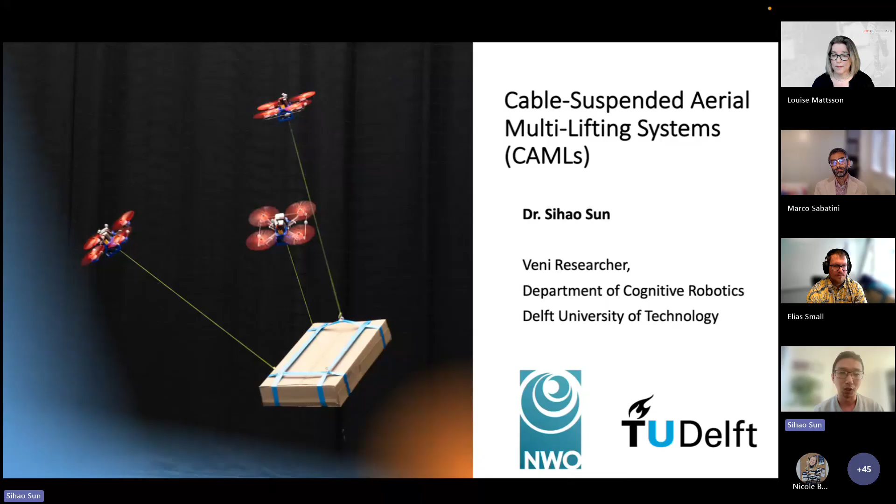Okay, so hello everyone, my name is Sihao, and I'm currently a researcher from TU Delft, embedded in the Department of Cognitive Robotics. The title of my presentation is Cable Suspended Aerial Multi-Lifting System. The name is rather complicated, but from the picture on the left-hand side, you can tell that we want to use multiple drones, quadcopters, to carry and also manipulate the orientation of this cable suspended payload.

So why do we do that? Carrying a cable suspended payload with an aerial platform has been a long-standing approach, and we have seen that in many domains already, in particular using helicopters. For instance, we see helicopters for logging, for transportation of construction materials, and even for some military purposes. But in recent years, we also saw some development of heavy lifting drones, and some deployment of them in offshore transportation scenarios.

In particular, the one on the top right is the heavy lifting drone developed by an Italian company called Flying Basket. Their drone can lift up to 100 kilograms. And now they are collaborating with companies in the North Sea to carry equipment to offshore wind turbines. So actually, there are many applications possible, not only in Europe but also globally.

But if you look at these two types of loading methods in the general landscape of aerial carrying, you can see that there are still big gaps between the current technology and our requirements. On the very left-hand side, that's using a small UAV for carrying the payload. The problem of using a relatively small UAV is that the payload capacity is very limited. For now, the biggest quadcopters or octocopters which can carry payloads are roughly in the range of 200 kilograms of payload capacity.

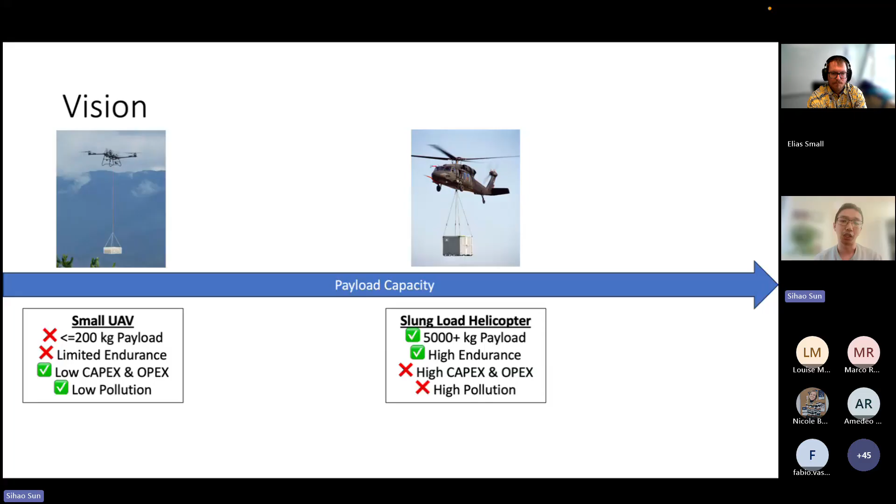And since most of them are battery powered, they also have very limited endurance. If you look at the helicopters, of course they have a much heavier payload capacity, but the problem is that they require very high operation cost and also relatively high pollution. So if we want to fill the gap between these two categories, either we make the helicopter smaller or we enlarge the UAVs, but that won't fundamentally solve the problems of these two categories.

Another solution is what we proposed here, and you may have already seen some recent videos released by DJI two days ago. Basically, we can use a team of UAVs to collaborate and carry the payload, because we can change the size of the UAVs and the number of UAVs included in the team. So the payload capacity can be largely increased without the need to develop very large scale UAVs. This has the advantages of both categories on the left and the right-hand side.

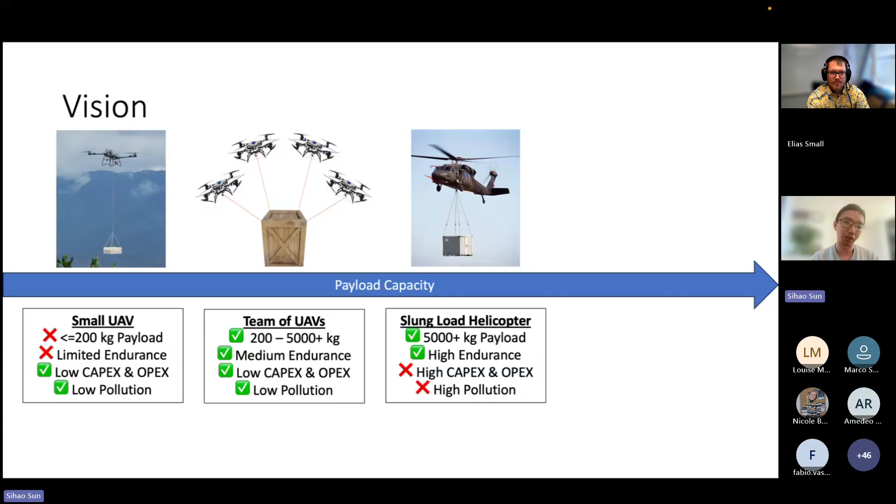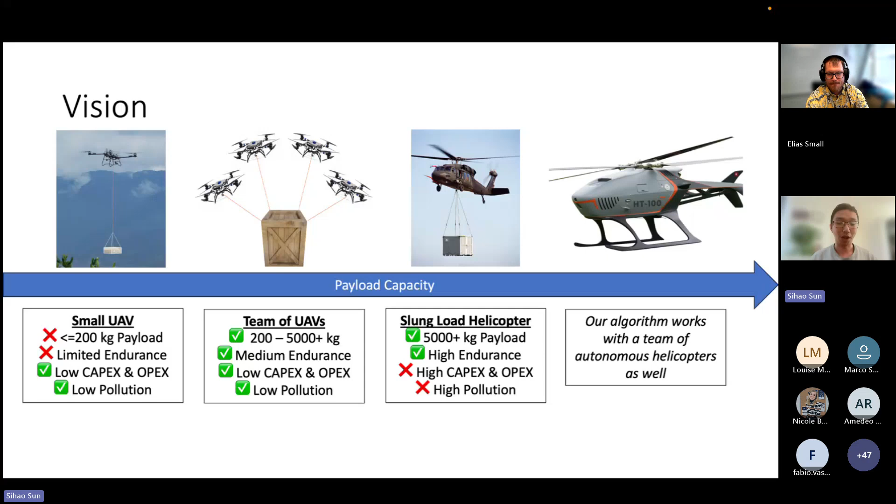And on top of that, if we think about the future, potentially we can also make the helicopters unmanned and fully autonomous. Then we can use our algorithms to team up many heavy lifting helicopters, and lift payloads that are much heavier, even over 100 tons, for instance.

To develop and test these algorithms in our lab, we can't make a very big platform because it's mainly for prototyping. So the platform we're using is actually a very lightweight UAV. Here you can see it's a self-made UAV, and the takeoff weight is only 650 grams. We use a Raspberry Pi 5 as the onboard compute module to run, or partially run, our algorithms.

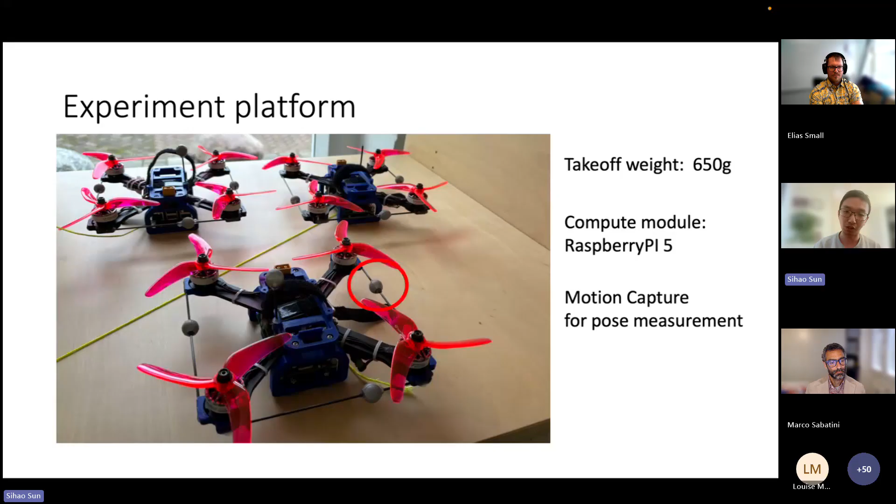Since we do everything in the indoor environment, we also attach the OptiTrack or Vicon markers for the motion capture systems to provide the pose measurements. Of course, if we want to move to outdoor environments, we're going to change this to RTK GPS together with the magnetometer, along with some other sensor fusion algorithms, but those will be future work.

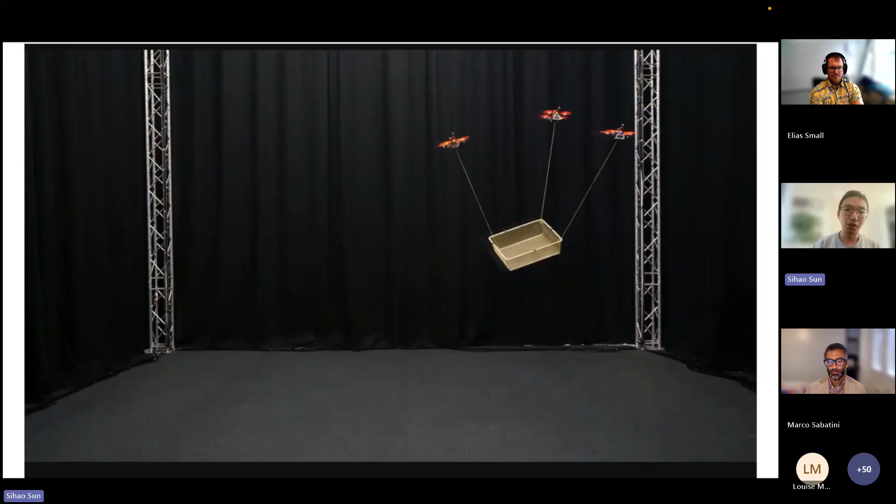So with our platform, what we have achieved, as you can see in this video, is that we can use 3 or 4 UAVs to collaboratively carry payloads. On top of that, we can also change its orientation. And here you see that we can even change the shape or configuration of this team of robots in order to squeeze into this vertically oriented gap, which is even narrower than the width of the entire system.

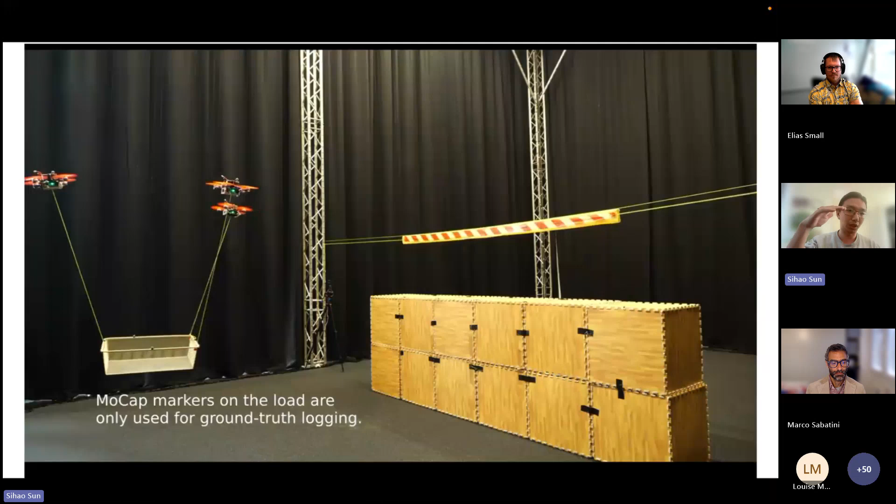This is another example. We put a horizontally oriented gap, which is also narrower than the size of the entire system. You can see that our algorithms generate these receding horizon trajectories and send them to the 3 UAVs included in this task.

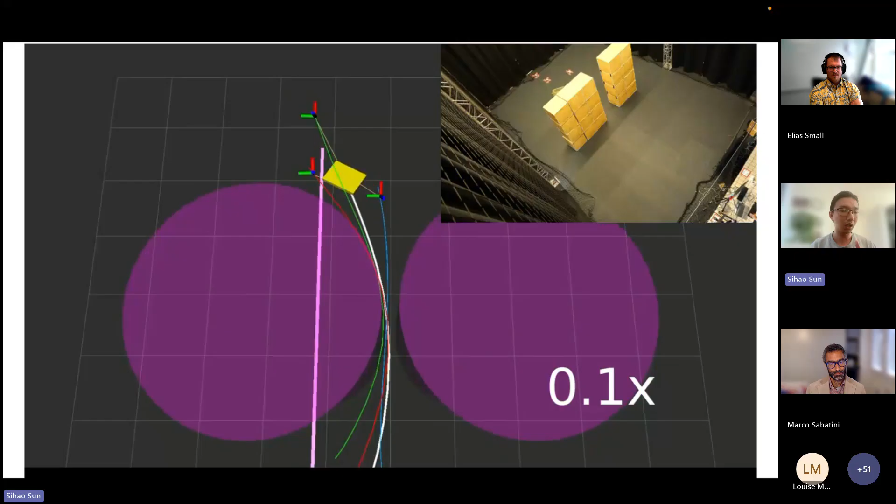When the 3 UAVs are following these trajectories, they can avoid these no-fly zones, and on top of that, they can also control the payload and even change the inclination of the payload in order to squeeze into this narrow gap. So by providing global trajectories, our system can follow them.

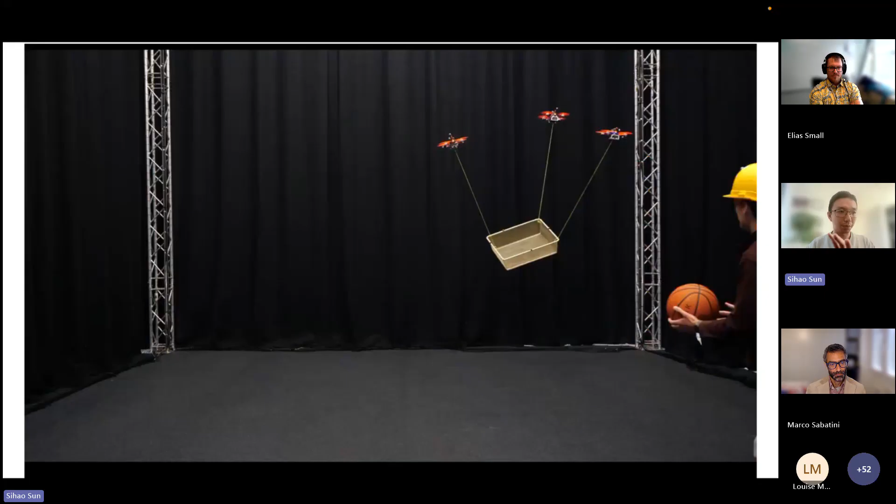And here you see that my colleague throws a basketball into this basket-shaped payload to induce some additional, let's say, sloshing disturbances. These disturbances are not considered by our algorithm beforehand, and our method can react to this sudden change of the payload, showing its robustness.

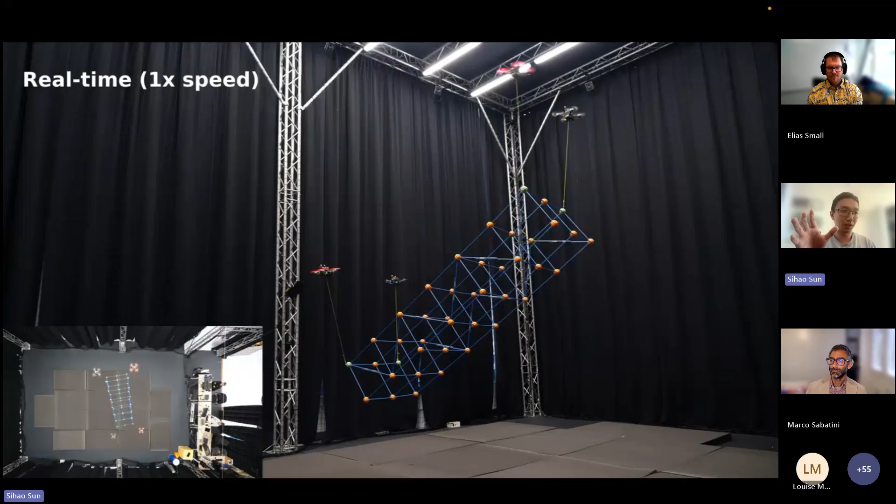This is another example that we explored recently. Here you can see that I use four of those small UAVs to carry a very large-scale space frame. The space frame weighs 3 kilograms. It's still quite lightweight because it's made from the DIY toy of my daughter. And the size is 3 meters, but you can still see that we can already change its orientation at a relatively fast speed, without violating the constraints of the drones.

And this can already imply some potential future applications. For instance, this is one funding that we recently got. It's about how to explore using these solutions for construction. If we can use multiple of these cable-suspended aerial multi-lifting systems, or CAMLs, we can really deliver the prefabricated building components on site and change their orientations to put them at the right location.

And we could also use our other aerial robotic manipulators to help with these assembly procedures. I think that could open up a lot of opportunities in the future.

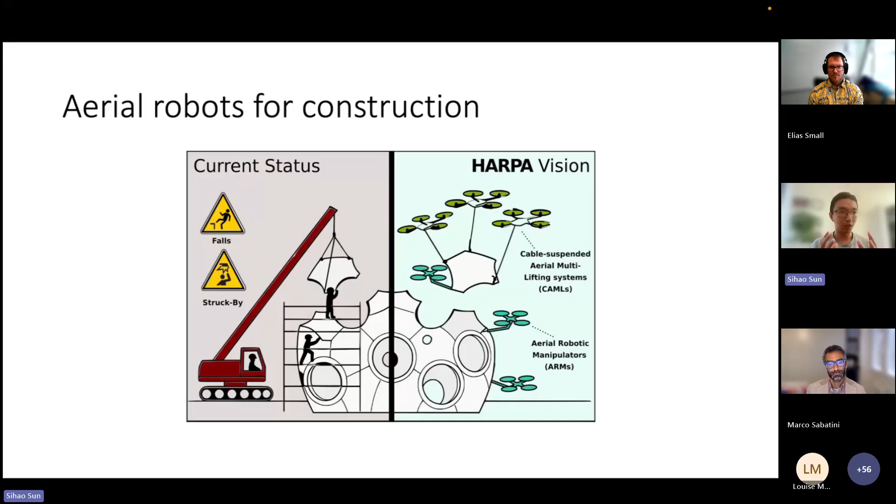All right, so until now, the methods that I developed are centralized, right? From the academic point of view, a very interesting question is how we can coordinate multiple UAVs without a centralized planner. Because if we use a centralized planner, first of all, we rely on very reliable communication data links, because you need all the UAVs to communicate with the centralized planner very reliably.

Another caveat of the centralized planner is that the more UAVs involved in the planner, the heavier the computational load it requires, and that limits the potential of this approach. Imagine if you want to involve over 10 UAVs or even up to 100 UAVs in this problem, then it won't be possible with the current centralized planner. So we need to explore decentralized solutions.

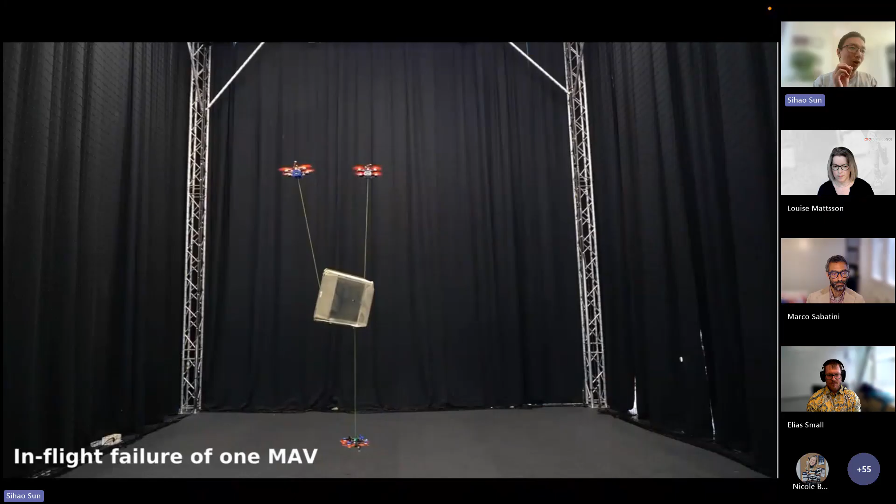So the benefit of this reinforcement learning approach is not only achieving a similar performance to the teacher policy, because we also see some behavior that can emerge from this multi-agent RL. So here's an example. You see that we have 3 drones hovering, and all of a sudden we switch off one of the UAVs, and you can see that the remaining 2 UAVs, first of all, won't crash, right?

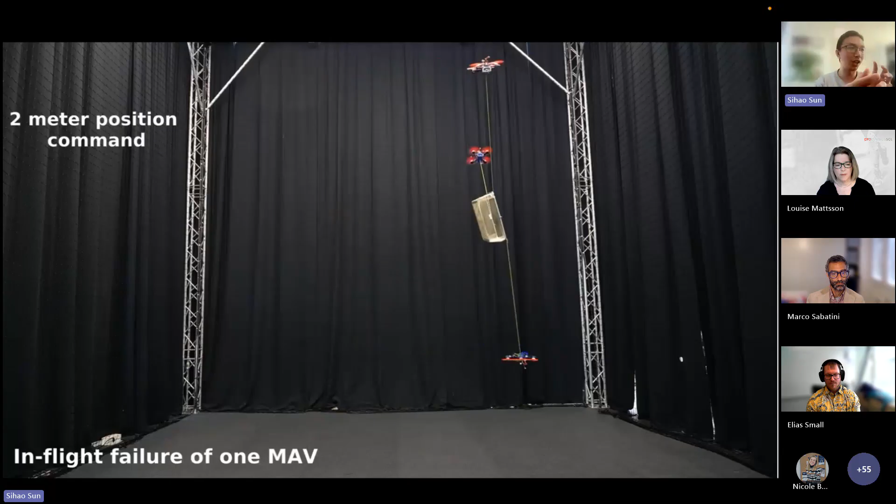And on top of that, they can even change the remaining degrees of freedom of the payload. We can change the heading by 180 degrees, and we can even change the position of the payload after the failure of the single UAV. This scenario is never seen in the training environment, but it does emerge in the real world scenario. I think this is very, very inspiring, because it demonstrates that our solutions can be relatively robust and also safe in the real world.

Okay, the last piece, I just want to share some future and ongoing works, and so you can tell that to deploy the system really in real-world scenarios, it's still a long road to go. So we are working on wind resilient control. So if there's heavy wind blowing on the payload or on the drones, how can we maintain the stability and also ensure the positions of the tracking?

That's one major challenge. The second challenge is to deploy the system in outdoor environments. Then we need to resolve the state estimation outdoors. We will need to develop the sensor fusion between, for example, cameras, GPS, and multiple other sensors. Last but not least, some algorithms are still deployed off-board, like the centralized part, and how to make sure that we can deploy everything on board is also an ongoing challenge.

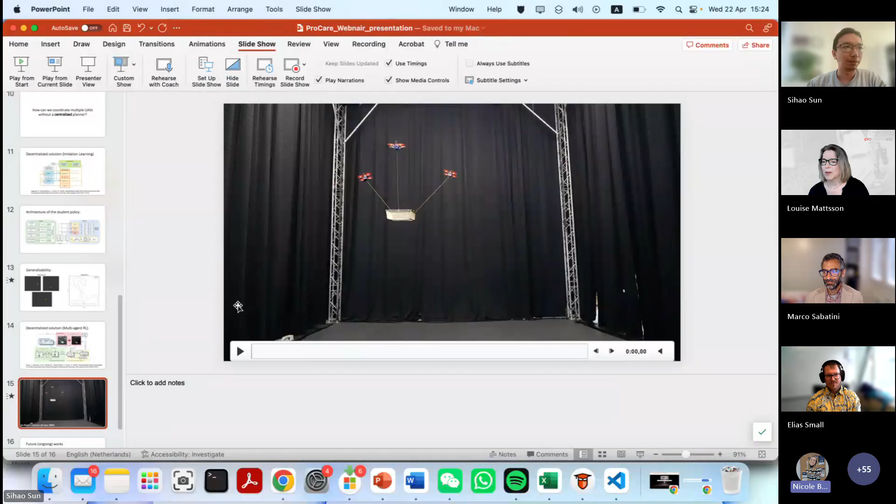Thank you very much. We have a few minutes left for questions, if there are any. Nicole, have we got any questions yet? We don't have any questions in the Q&A, but people have time. You sort of touched on the very question I had in mind when I listened in the end. Oh, I think we have a question there from... I think we have a question too. Yes. Can you unmute yourself, Sally? I don't know if there was a question there from you, Saleh.

If not, my question was basically, when you go to the decentralized solution where you have all the drones moving in a team, are you still in contact with them, or is it not possible to control anything anymore if a drone goes rogue? Are you able to do anything? That's a good question. In the experiment environments, of course, we still have control for that. There will be some high-level safety guard to ensure that they won't go crazy. And if they go crazy, we can also have a centralized approach to take over them.

That's for sure. But I believe in the future, in real-world applications, it really depends on the level of autonomy that we want it to go, right? Like if you look at the current humanoid robots deployed in factory environments, we want them to be fully autonomous, but of course there must be a safety guard to ensure that they're still under control by us. So I think the same principle should also apply to our system. Thank you very much.

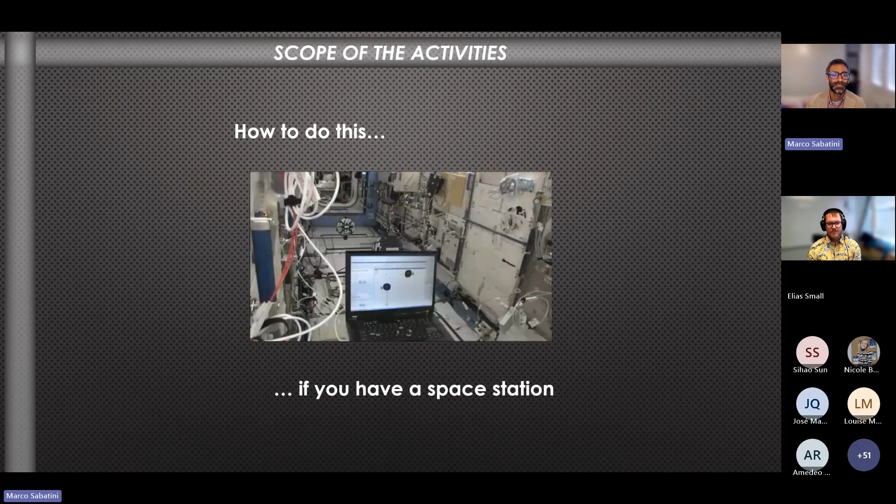Now, I asked my administration if we could buy a space station. They didn't say no. They said maybe you'd better look for some alternatives.

So what is usually done in terrestrial laboratories is trying to replicate some of the aspects of the orbital dynamics. The main aspect, of course, is the fact that you don't have a strong gravity in space. On ground, you cannot remove gravity, but you could try to remove some of the effects of gravity. In particular, you would like to remove the reactions between the subsystem under test and the table, the support. So basically, you should remove the friction. If you do so, you can try to simulate orbital dynamics, even if limited to some specific aspect.

So, for example, if you want to test attitude control systems, you would go for spherical air bearings in such a way that you have a body that is able to move almost without the effects of gravity around the central body. If instead you have to test multiple platforms and you are also interested in linear motion, then you can go for planar air bearings. In both cases, what you need to do is to give up some of the degrees of freedom of the space systems. In both cases, you just simulate 3 degrees of freedom, so 3 rotations in the first case, 1 rotation and 2 translations in the second case.

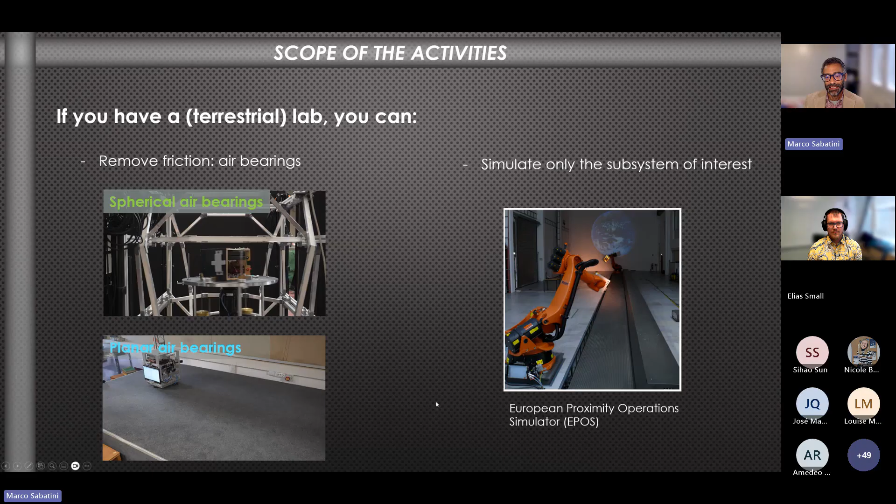Another approach, completely different, is just to test the hardware in the loop by simulating the motion of the satellite, for example, with robotic arms. In particular, this happens if you want to test relative navigation subsystems and you are not really interested in testing the effects of the control of the satellite. So in my presentation, I would like to show all of the three ways of simulating the orbital dynamics. I will start with the attitude control systems.

So we realized this facility in our laboratories. The goal of this facility is to test both navigation and control subsystems. So, for example, magnetometers, magnetorquers, reaction wheels, sun sensors. So what we had to do is to recreate the orbital environment also from the magnetic point of view, from the illumination point of view. But of course, the core is the removal of the gravity torques.

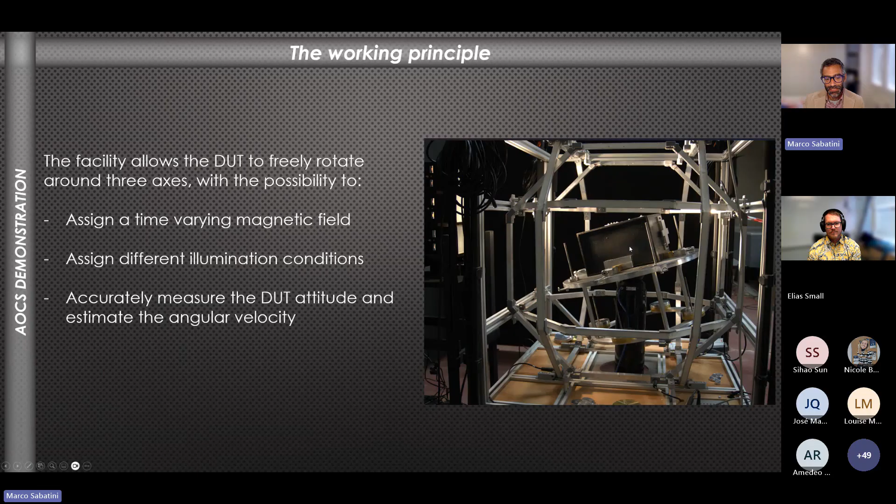So the black box that you can see here is the device under test that usually is a microsatellite of the CubeSat class. The main concept is that for removing the torques due to gravity, you should have the center of mass perfectly coinciding with the rotation center of the system. If it is above, you have basically an inverted pendulum, so you have an unstable motion and the platform will roll over. If it is below, it is stable, but then you have harmonic motion, so this is not what you have on orbit.

So what you would like to have is a center of mass ideally coinciding with the center of rotation, but possibly a little bit lower, so that we are sure that we don't go in the unstable region. To do so, we have to make a balance system. It could be an automatic balance system, it could be manual.

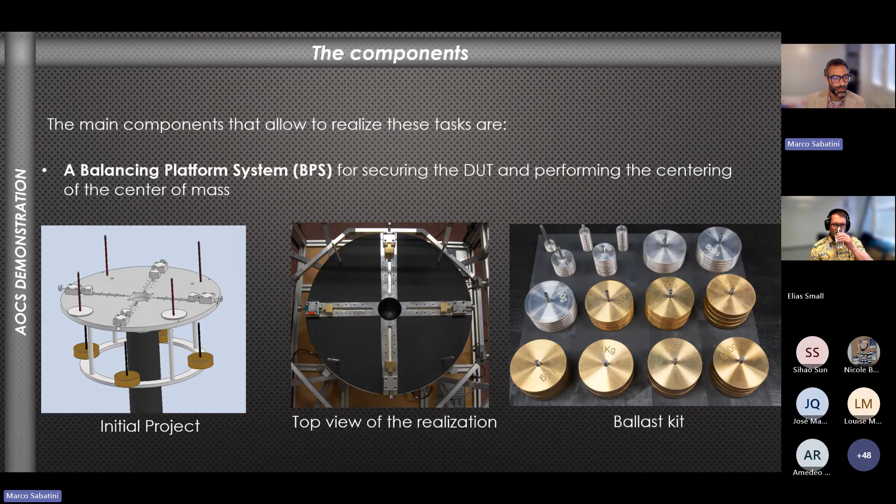We chose to go for manual balancing because, of course, an automatic system could ease this task, but could also increase the mass with motors, moving masses, and so on.

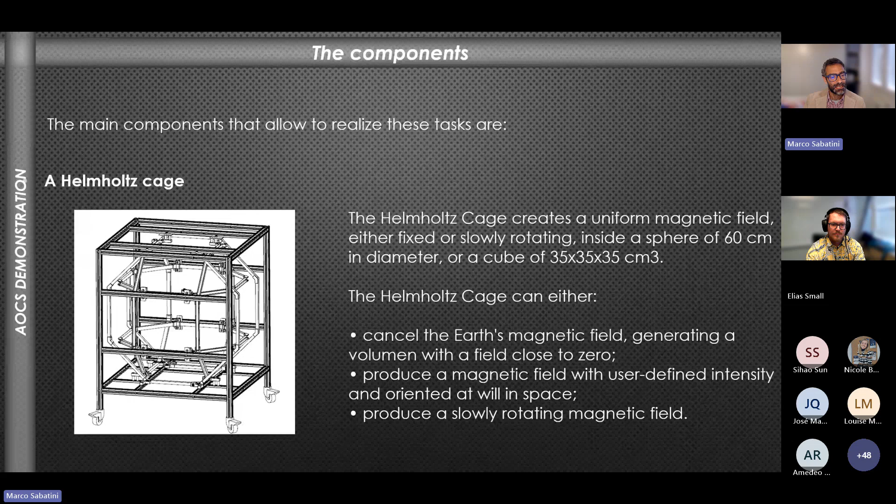So the main components, apart from the mass balances, are the Helmholtz cage, which must be able to replicate the time-varying magnetic field that is sensed by the satellite during its motion around the Earth, and the sun simulator, which must be able to simulate, of course, also the eclipse time and so on.

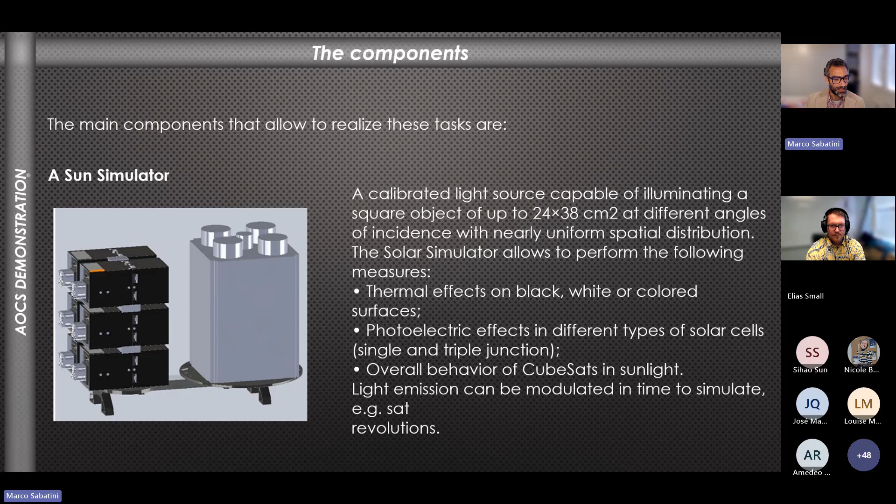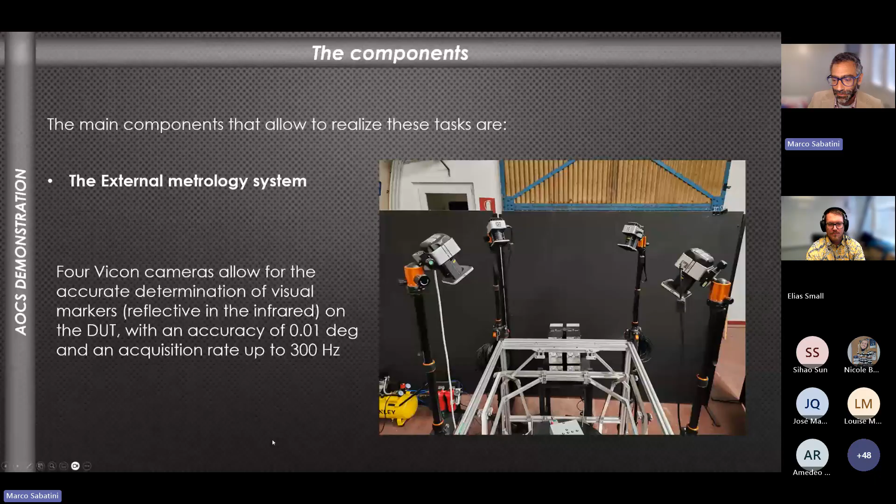One of the main aspects is the external metrology system, because of course we have to know the ground truth of the attitude of the device under test, and we used 4 Vicon cameras in a very compact setup, which was quite extreme because the view of the cameras was cluttered by the structure of the Helmholtz cage, but in the end we managed to achieve very good results that we show in a second.

The device under test must not have any connection with the external world, because of course every connection would change the forces. So everything, every sensor, the Helmholtz cage, the sun simulator, the Vicon cameras are connected to a desktop PC, and all the information is exchanged via Wi-Fi with the device under test.

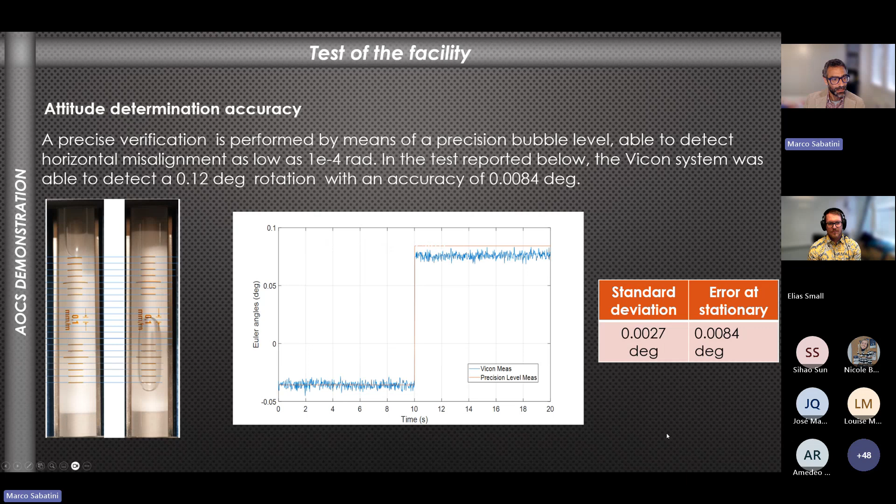And up to now, I have talked about frictionless motion. Of course, it is not really frictionless. It's micro friction, but there is some friction. So we had to estimate how much friction there is by measuring the decrease in angular velocity in a free rotation. And also we had to, for each experiment, measure the unbalancing.

For us, the measure of the accuracy of the balancing procedure is the period of the free oscillations. If the period was about 20 seconds, for us it was satisfactory, because for the inertia and masses involved, it means that the misalignment of the center of mass is sub-millimeter. So this is the level that we are happy with.

And once we have characterized everything, we can simulate our space mission. We can simulate a certain orbit with a certain illumination, a certain magnetic field, and we can also simulate controlled attitude maneuvers. So in this case, our device under test just contains some masses and a single axis reaction wheel that, of course, is able to perform a controlled maneuver about one single axis at a time. So here we can see a reorientation about the vertical axis. The other two angles are not controlled, but the controlled one is very satisfactory.

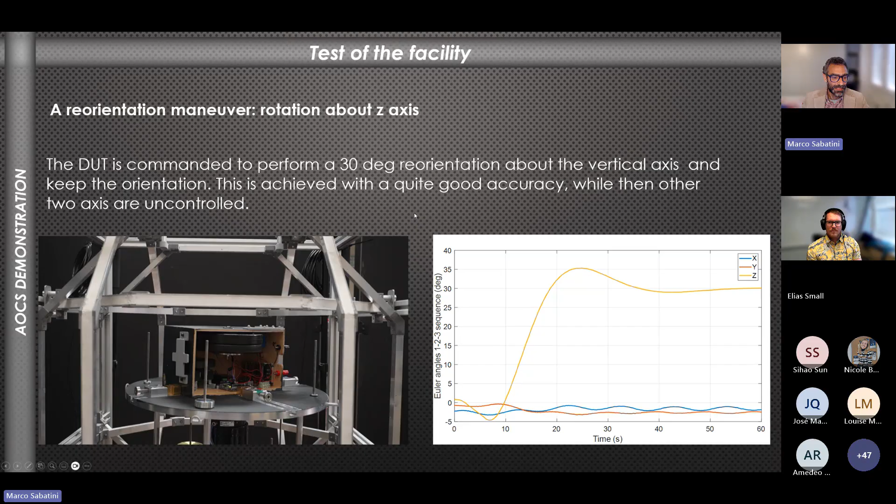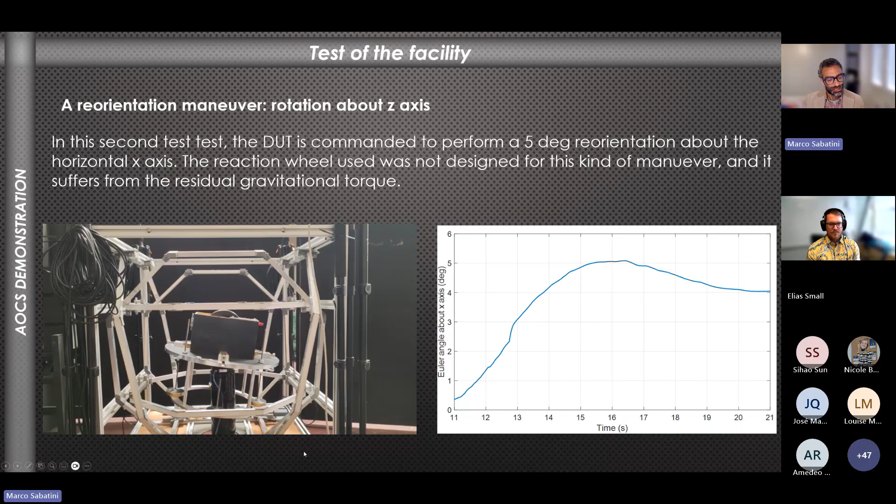And also a reorientation can be performed about the other two axes, which are more difficult, let's say, because in this case the role of the residual gravity starts to be important. In this case, the reaction wheel was like a toy wheel, so we did not expect so much performance, but we demonstrated that this is possible.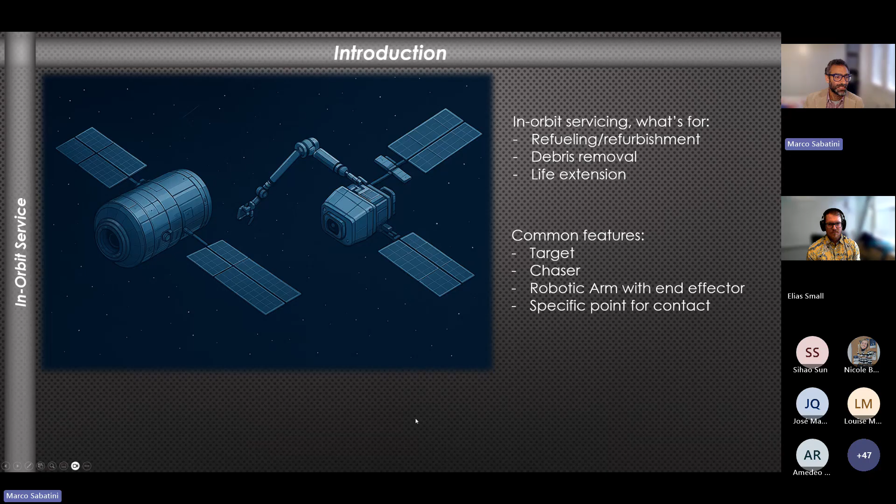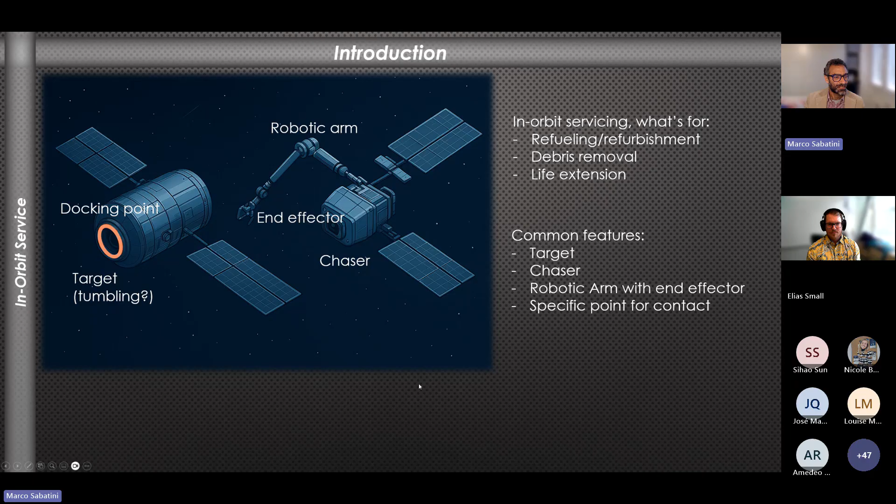Now, let's go to the second topic, which is in some aspects completely different, but there are some commonalities. So usually in space proximity operations, you have two main characters. One is the target that could be perfectly functional and waiting for you, but could also be tumbling or even a dead body, a debris. And the chaser with a robotic arm, which has the goal to grasp this target.

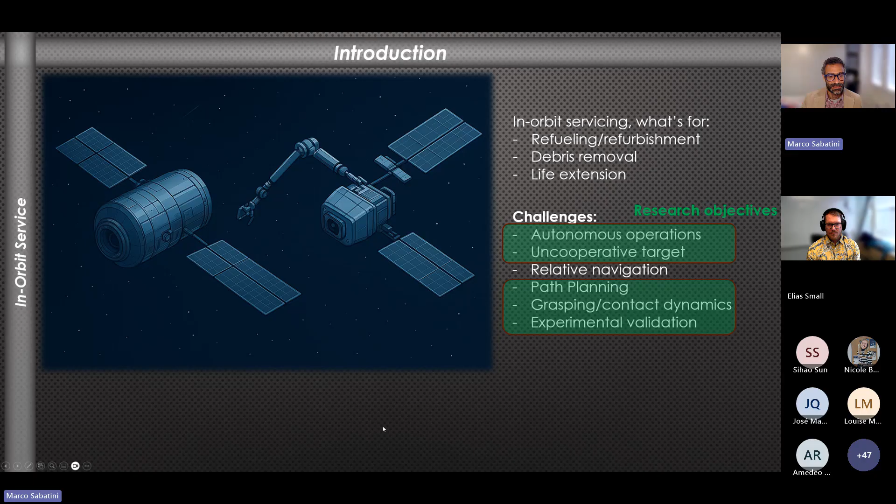We focused on some specific aspects of this mission, in particular path planning and control, not on relative navigation, which is quite an important topic, but for these experiments we suppose that this problem is solved. So somebody is giving the real relative state, and in this case it's the Vicon system that is giving this information. So the problem is that the chaser should catch a certain point, which is this yellow ring of the target, of course without colliding with the structure of the target itself.

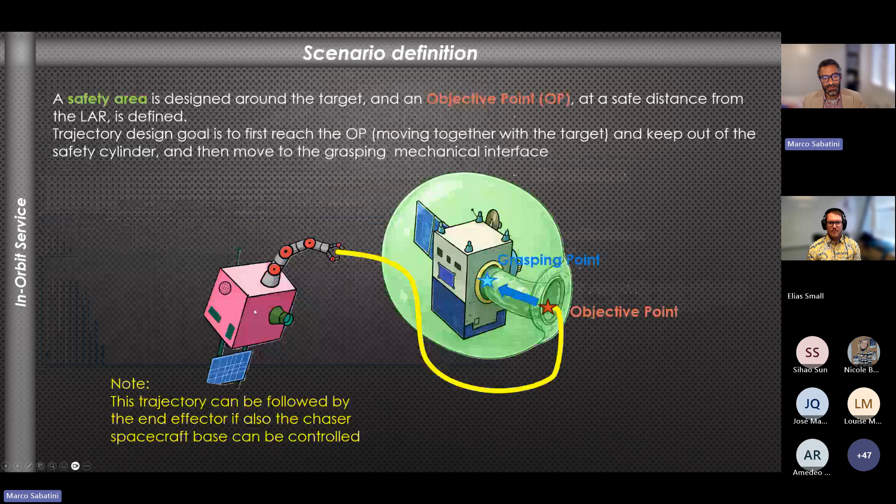So to do so, we fixed some zones to be avoided, and the role of the path planning is to define trajectories with some intermediate waypoints and a final approach line, so that all the structures are avoided and the grasping point is reached. To do so, we cannot just move the robotic arm, we have to move both the spacecraft and the robotic arm. So it's a complex problem with 8 degrees of freedom.

The trajectory planning is a bidirectional, rapidly exploring random tree. I will not go into the details, but it's a random search algorithm. The bidirectional version has two branches starting from the target and from the initial point. The result is this scattered trajectory. We can smooth, of course, this trajectory. The good thing is that finding this line that reaches the desired point without colliding is very fast.

So we can recompute this path with 0.1 second sampling time, so that even if the target is rotating or tumbling or moving, we can always update this trajectory and achieve our goal.

So how was this realized in our laboratory? We used both the approaches that we have seen in the beginning. So the chaser actually is not a free-floating platform. The spacecraft is represented by this rail, a linear rail, so it's just 1 degree of freedom, on which the robotic arm is mounted. While the target is a free-floating platform which is able to move, can be controlled or can be freely moved on this flat granite table.

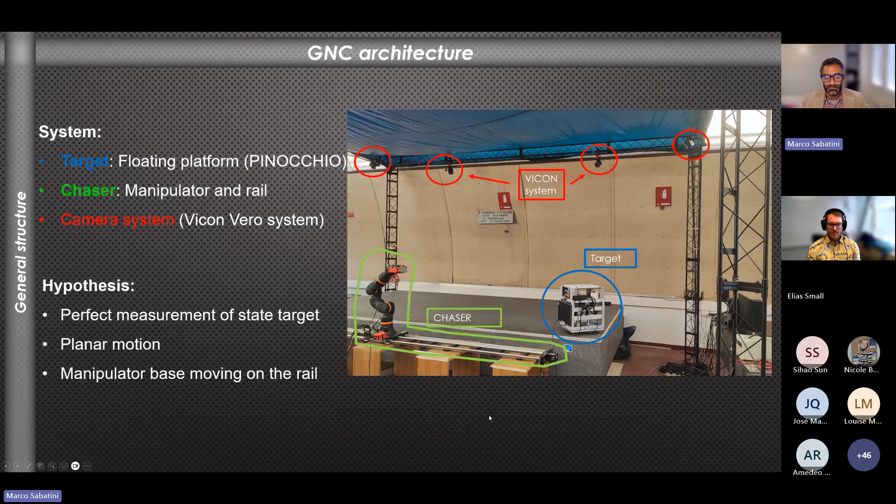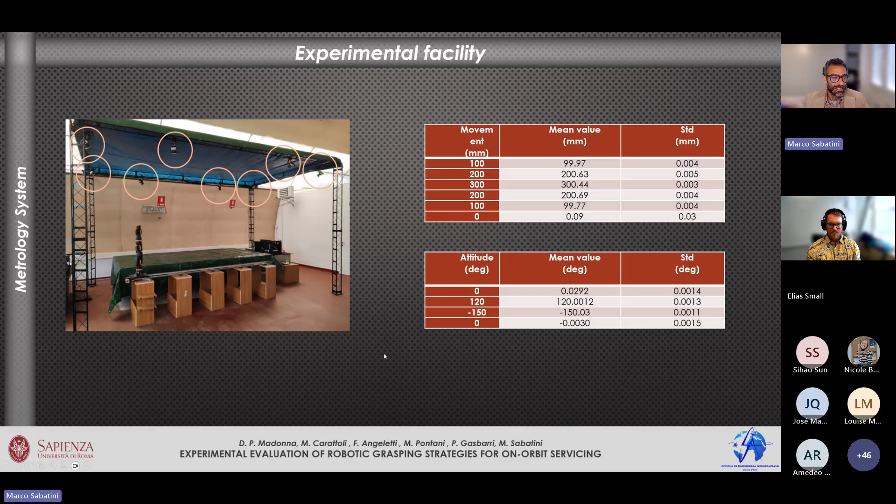And again, the external metrology system is the Vicon system. In this case, there are 8 cameras in a more conventional setup, and also with these distances and configuration, the accuracy that we reach in terms of linear motion and attitude is very satisfying. And so I will end showing 2 different maneuvers.

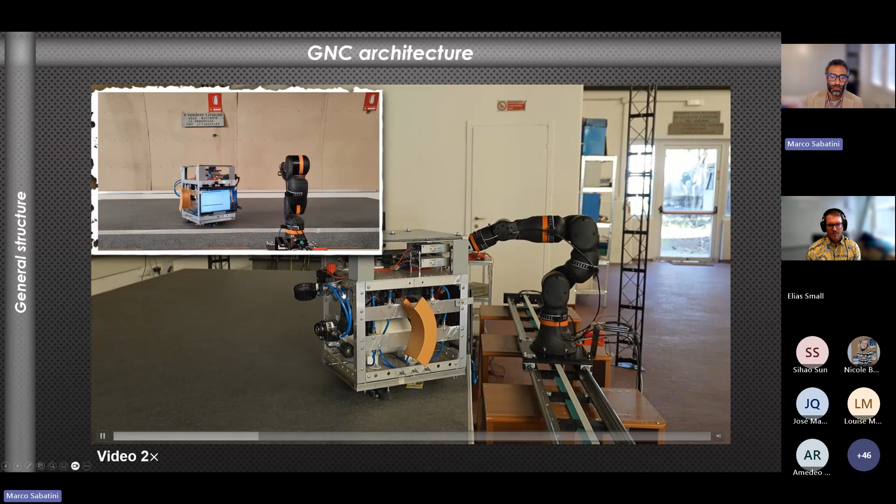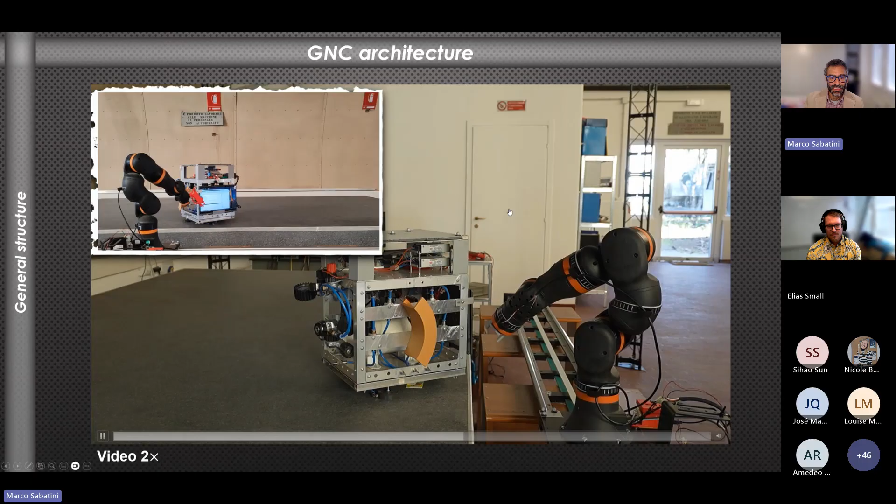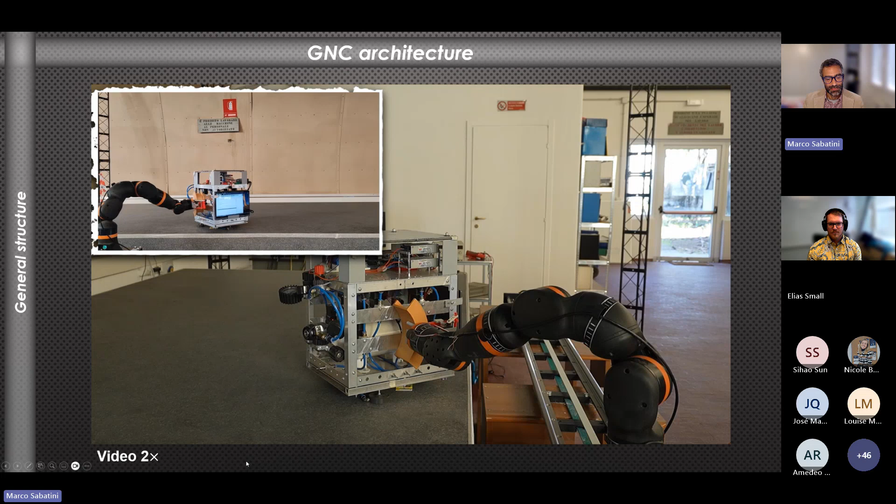In this first maneuver, the target is waiting for the robotic arm, but is in such a way that the robotic arm has to do some collision avoidance maneuver before grasping. So it cannot directly go to the target point, otherwise there would be, of course, a collision. It reaches the intermediate point and then performs the grasping. After this, of course, there is all the post-dynamic study that is still ongoing.

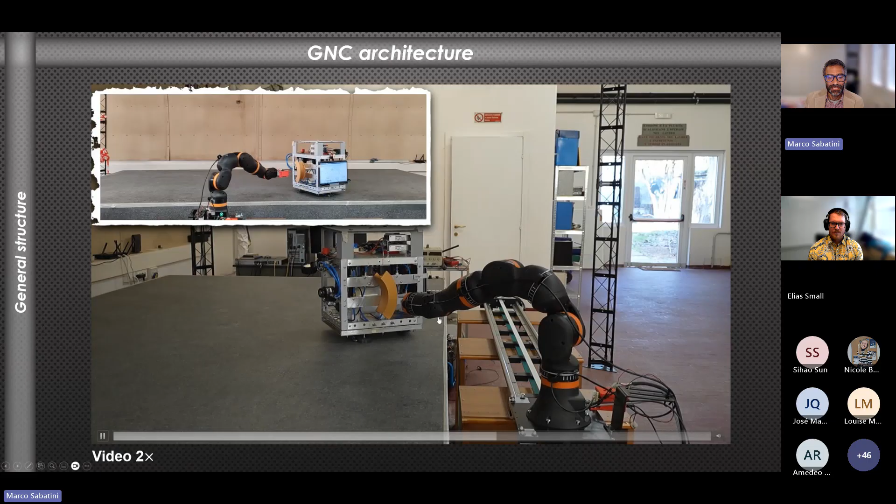The final experiment is with a tumbling target which is moving in an unknown way. So the fact that the trajectory can be recomputed very fast allows for the successful accomplishment of the maneuver.

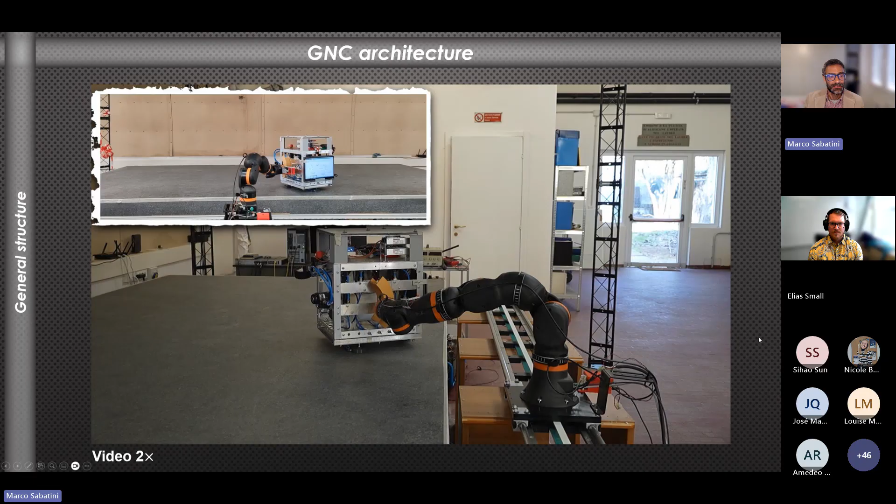Our final goal is to validate our simulations with this experiment. So when we obtain this kind of results, we are, say, quite happy, because qualitatively the experiments really replicated the simulation, with some additional noise that is expected due to hardware inaccuracy, navigation accuracy, and so on. But this is what we would like to do. It's not just testing space hardware, it's more validating the hardware and validating our software tools for the simulation.

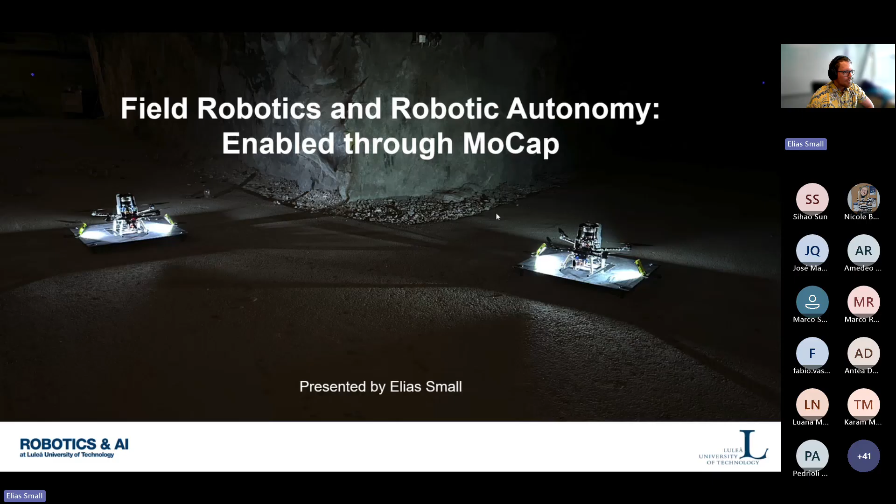As you can see by the picture we have here, this is an underground cave system where we are deploying some of our own built drones. You can see there's quite a lot that goes into having autonomous drones in this sense. They are quite heavy and require their own PCs on board to do computing. But to get to that stage, of course, we need to use motion capture because there's a lot of components that go into this. So first, I'll just give an introduction to our group.

We are about 60 people up here. And what is maybe a little bit uncommon with our group is that we have a lot of engineers working here, and this is mainly because we need to build and produce experiments to quite a large degree physically. In Sweden at least, it's quite common to have maybe one engineer per lab or per group, whereas we have 8 for our 4 labs.

We have a lot of subjects since we are quite a lot of people. Aerial robotics, inspection, service robotics, space robotics, as we saw in the previous presentation, similar things. Biorobotics, we work with industry, farming, even construction, autonomous vehicles, and even underwater. And when it comes to the motion capture, I think the only subject that can't really use the motion capture is the underwater, since it's quite difficult to bring the system underwater.

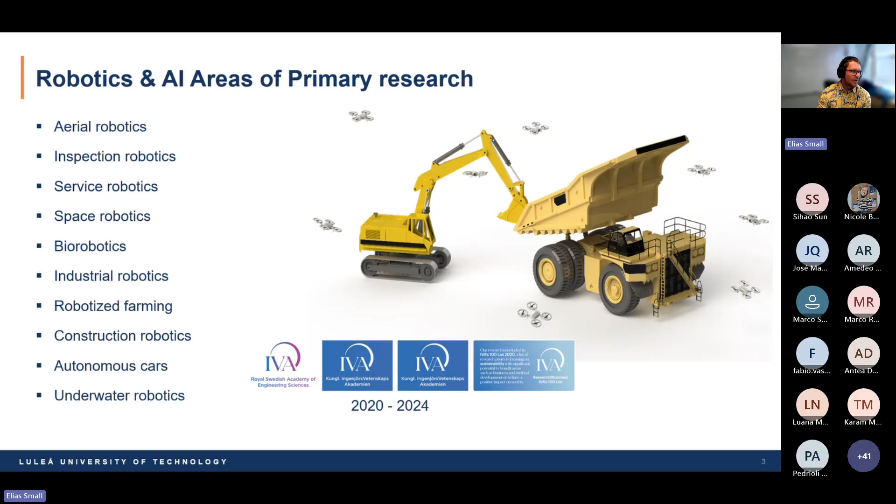We've been chosen by the Royal Swedish Academy of Engineering Sciences as being in the top 100 contributions for the past 5 years. The result hasn't come out yet for 2025, but we're hoping to be there as well.

So field robotics. I've chosen this picture to kind of show how much goes into bringing a system into a harsh environment like a cave system. Here many of you recognize Boston Dynamics Spot, the dog. Of course, this is the platform that we're using, but everything above that is what we built here. So you can see the LiDAR up top and a lot of 3D cameras. Of course, there's a PC unit that's computing everything, and an IMU, inertial measurement unit.

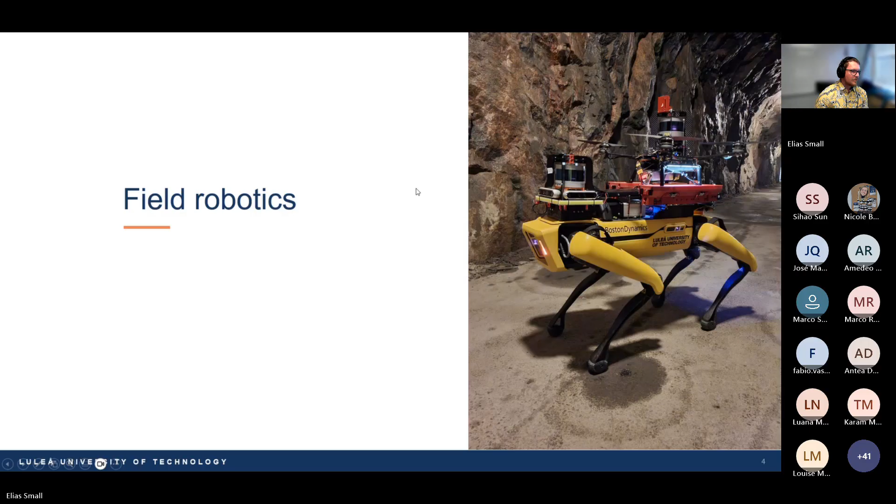And the same then, you can see on its back, it has a drone, which in itself has the same system on itself. And this is completely self-built, since these high computational drones aren't something that exists in the consumer market, let's say. So field robotics, this is our main goal. We have, of course, some other focuses. We're going to touch on space robotics as well.

And in our case, we mostly deal with planar motion, which is for instance the docking and the final slides we saw in the previous presentation. And we also deal with traversability. So what happens when we get to planets, for instance? How can we make the robots more autonomous in their navigation, since there's a very large delay and it's quite difficult to steer and drive a rover that's on Mars with an 18-minute delay. So we have this 10th scale model of Curiosity that's on Mars right now.

And finally, when it comes to having robots in real life, a big question on everyone's mind is how do we make this safe?

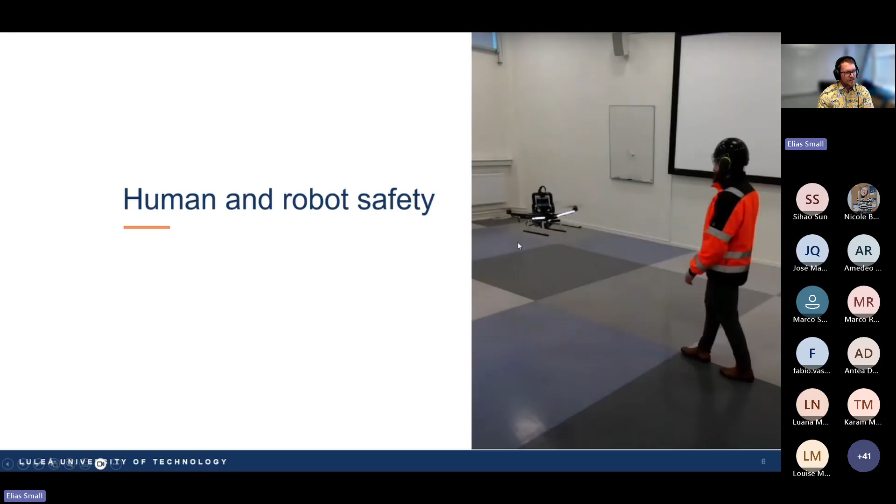So this is another of our focuses: how can we make the systems work and also be adaptable to the unpredictability of humans, let's put it this way. In this case here, of course, we're not actually using a Vicon system with this guy walking. That's why he's wearing quite some protective gear. This is using its own autonomous system. But of course, to get there, we needed the motion tracking system.

So I'm just going to go through our lab facilities, and then I'll be showing some experiments and tests that we've been doing. We have 4 labs. Our first lab we call the Frost Lab, mostly themed because of where we live, but we call it the Field Robotics Lab, and obscurely shorten that to Frost. In this lab, that's where everything starts. It gets built from scratch. We have workshops. We have 3D printers. A lot of facilities for students and researchers to work.

After that, things often move to a lab we call Concept Lab. That's what you can see here in the picture. I'll get into it soon. It's a much larger lab, and we're able to build environments that are suited for our tests. Then we have the aptly named Space Lab. This is a laboratory where we do the planar movement and experimentation for satellite maneuvering.

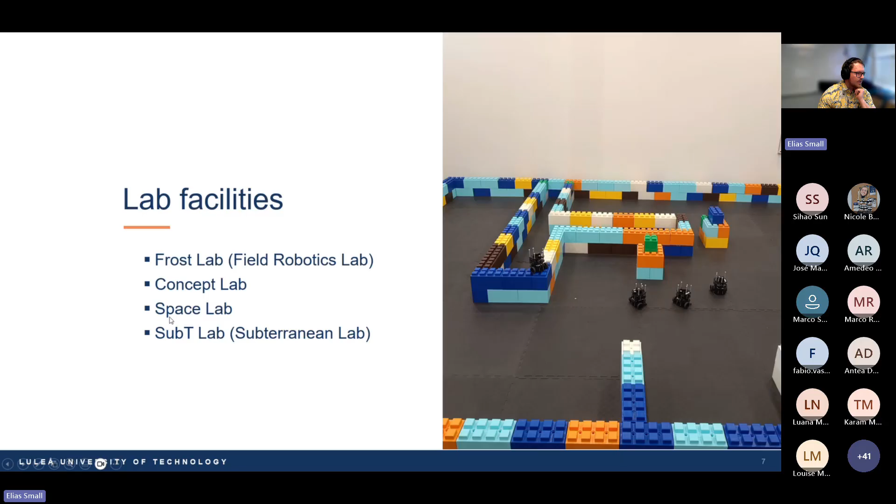And then the final lab, the Subterranean Lab. We have a laboratory that is underground in a cave space. We have both a little office space and also a lot of area for testing in the cave environments. The first 3 labs here are all equipped with the motion capture system. Only the Subterranean Lab doesn't have this, but we are able to bring it to that place if we need to.

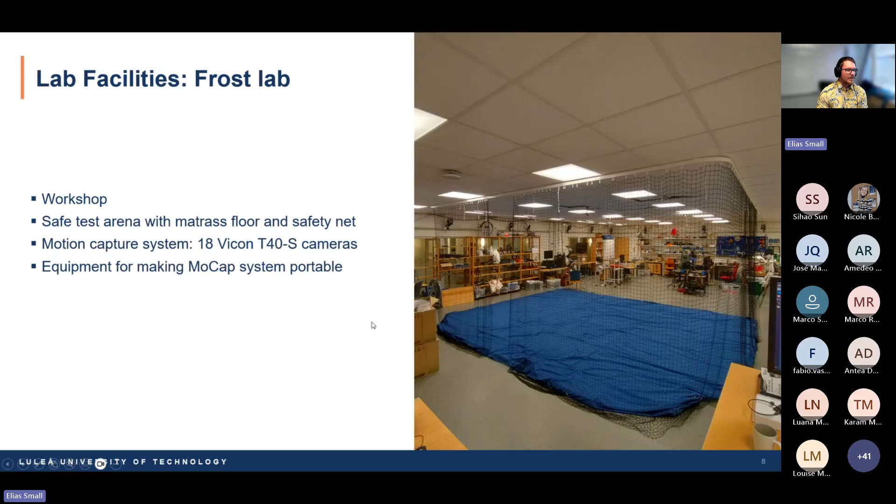We are also able, as you might see, to move them. We have these mounted so they're easy to detach from this rail. So we've moved the system onto a tripod system, so we can easily take it with us if we want to do tests in a different environment.

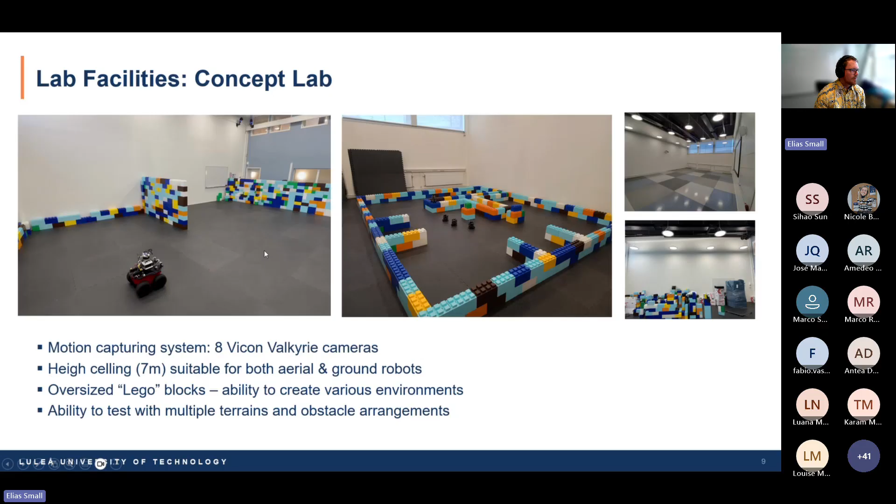Then, of course, we have the Concept Lab. Here we have a much higher roof, so we have 7 meters clearance. And you can see in each corner, we have 2 of these Valkyrie cameras that are facing inwards. And we have this huge setup of basically building blocks. We create environments for our robots. Sometimes we don't use that, but we have large ability to adapt this room to our needs. And also rubber flooring for when things don't go as well as we intend.

These are powered by compressed air, and each of these robots also has thrusters that also use the compressed air to simulate the thrusters of satellites. In each of the corners there are 2 thrusters pointing 90 degrees from each other. And they are in an on-off system rather than continuous, to make the maneuvering as hard as possible, basically to test our control algorithms.

And we also have a 6 degrees of freedom robotic arm at the top, so we can have, for instance, objects moving around or interacting with these bots if that's what the experiment requires. Also, it has an extender, so it can come all the way down to the bottom and has quite a large reach.

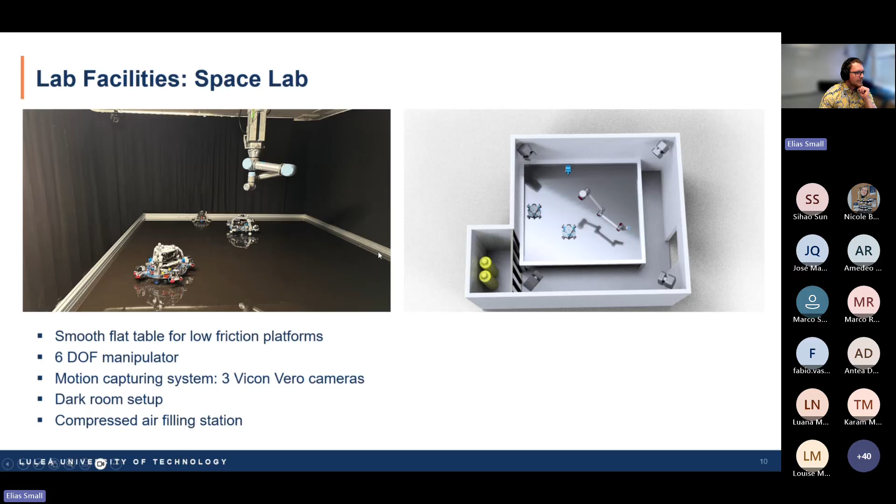So I'd like to just make a quick point about getting to this real environment. Basically, we have this flow that's quite logical. To test all of these control algorithms and the mathematics of it, it's always good to condense or remove the variable aspects. In this case, the positioning and maneuverability is what we are able to get to a sub-millimeter level in the initial labs with the motion capture system. Whereas this system is then replaced by LiDAR, cameras, IMUs, and its own computation once you get into a real environment.

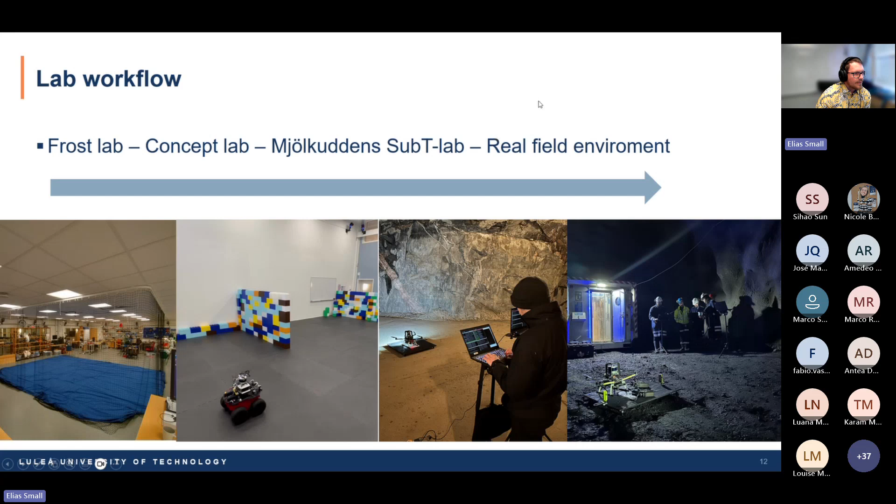And eventually, as you see in the last picture, these are actual tests being done 1,700 meters underground at the LKAB iron ore mines, even further north than where I live, in Kiruna. So then I'd like to get into showing you some of the things we do.

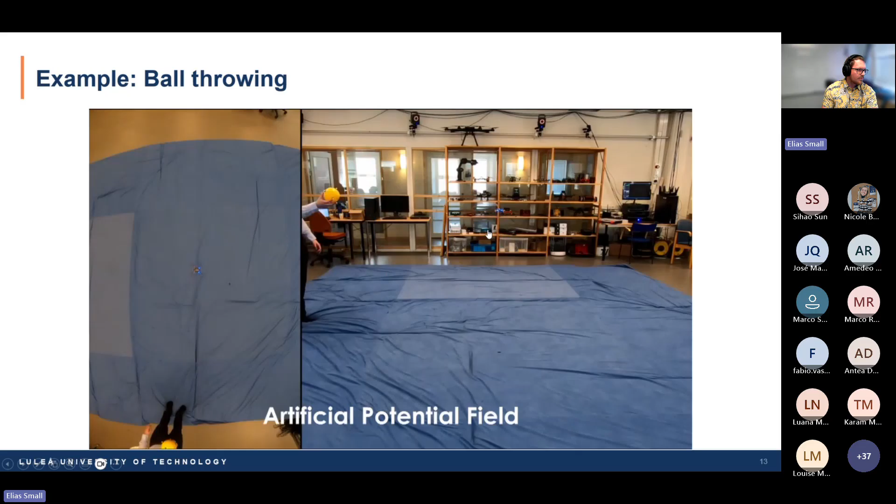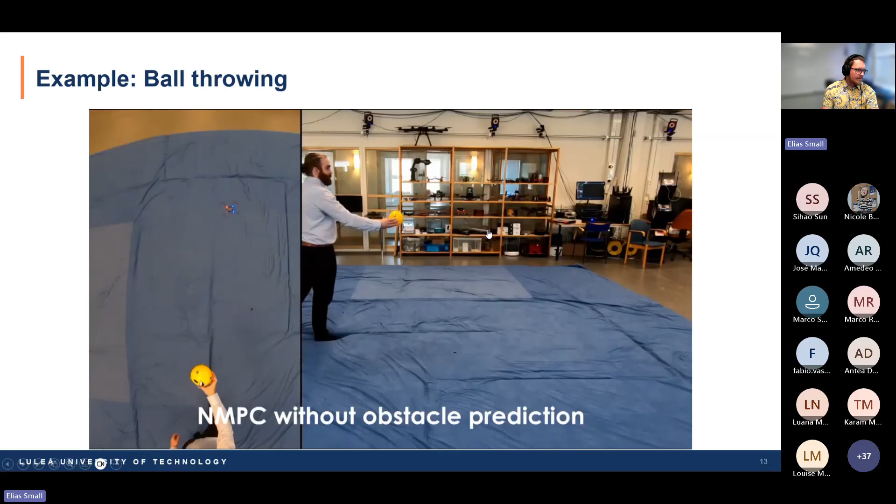Now, one of the main things when we are working with these things is how do we have several things in the same room without them actually colliding with each other. There are many different methods. A classic method, what we see here, is an artificial potential field: try to avoid and don't get too close. But what happens when things are moving too fast? This is showing you what happens when an object is moving closer. Instead of just having a potential field, how about we try to predict where the object is going to be? And even that can be a little bit slow.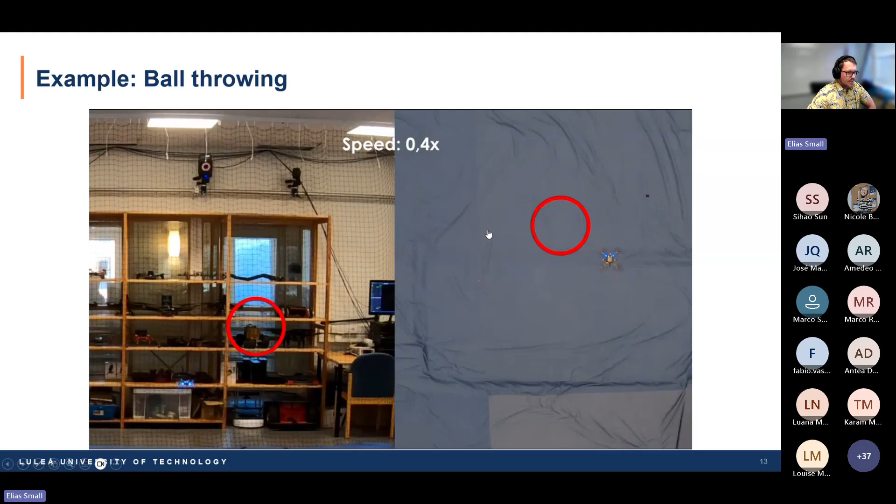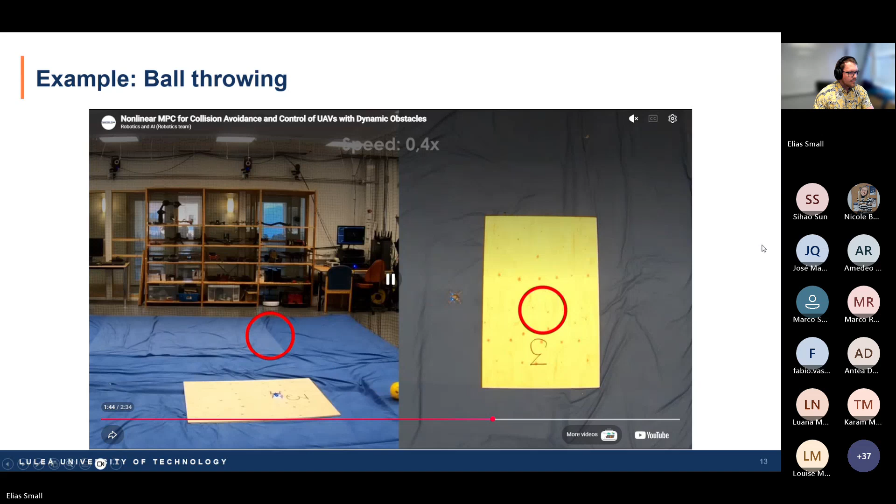So if you have what we talked about earlier, a centralized system, in this case the system is predicting both where the ball is going and its continuous trajectory afterwards. As you can see, the drone is able to react as soon as it detects any motion that might be coming towards it. And here we can see that can even include bouncing, where it's moving out of the way for the bounce of the ball. I'll move on to the next slide.

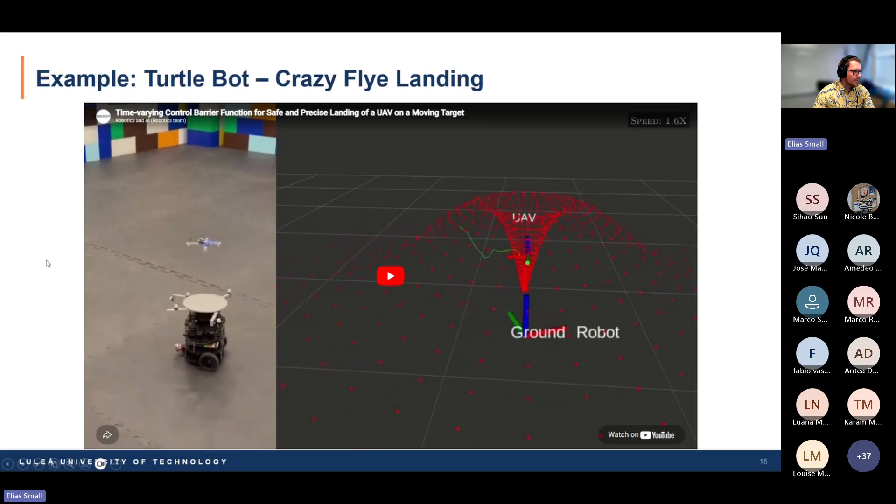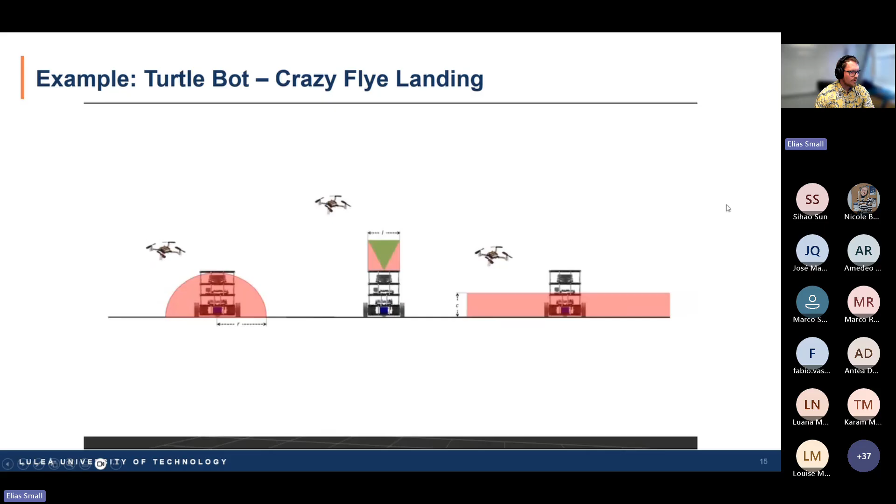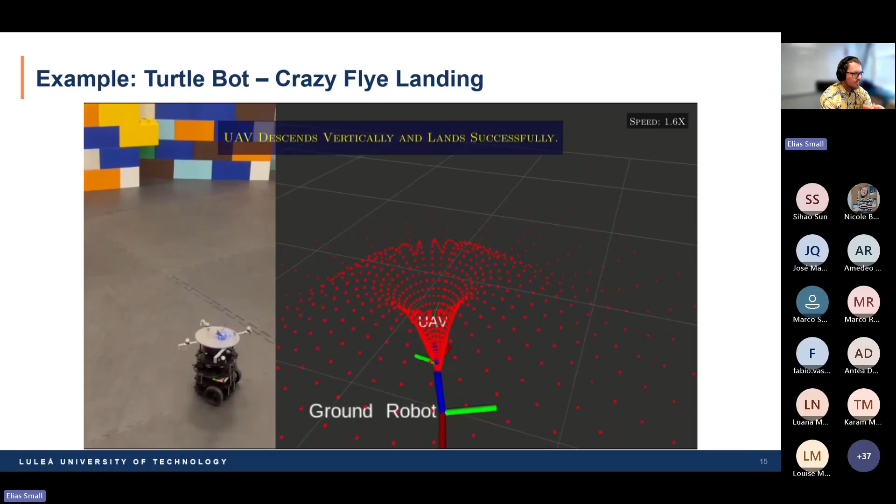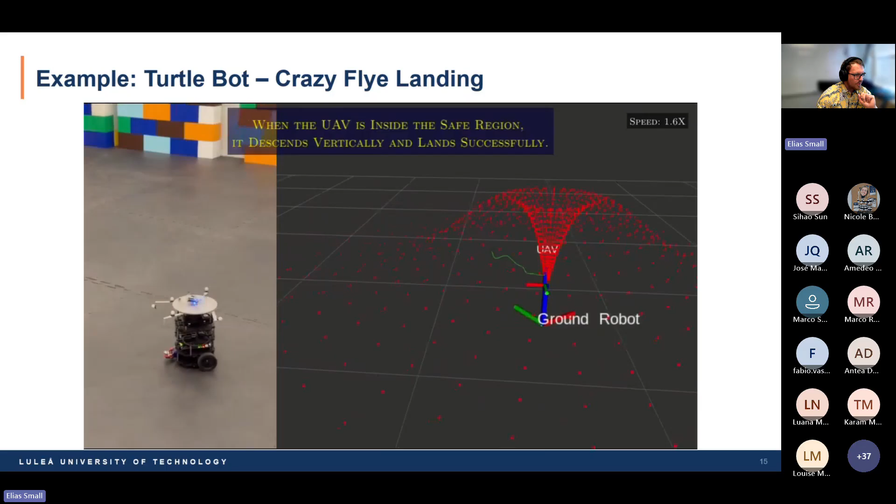I thought I'd show one little video on the space side. We were doing the docking maneuvers we were talking about earlier of this two-dimensional planar space movement. And in this case, this drone is tethered. This experiment is from before we had built our lab.

But as you can see the Vicon markers, and we're using this system to further extend, similar to the landing of the previous drone on a platform. Here we're doing the docking, and the control systems are using the air thrusters to try to get this device on a frictionless surface to dock properly into its station.

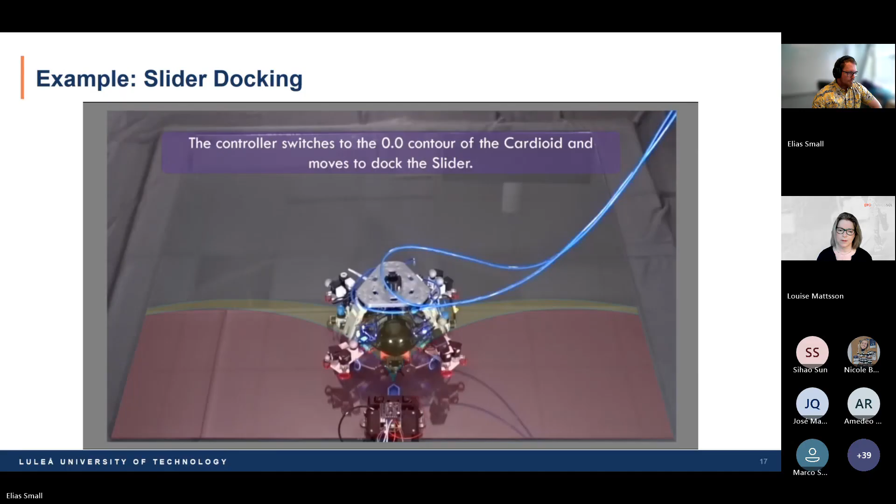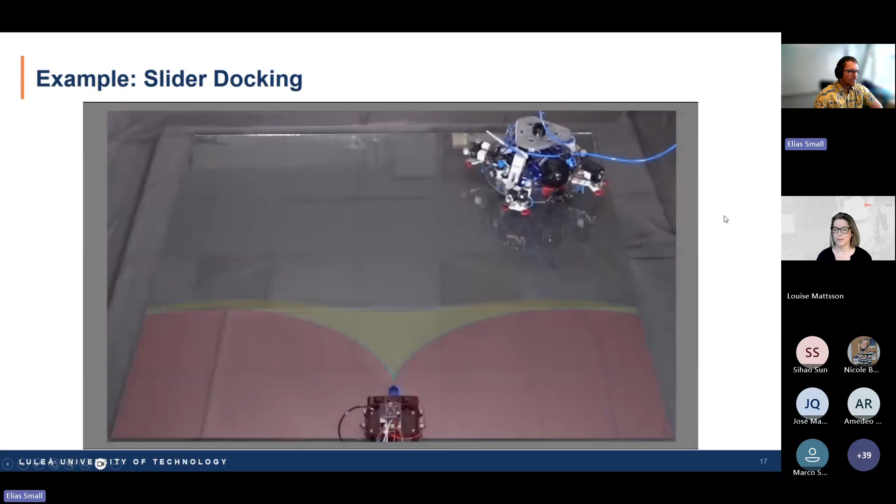Some improvements can be made, but it's very cool that we can do this in a lab in a university rather than having to have expensive equipment and going up into space, or as you say, into dives with very large airplanes.

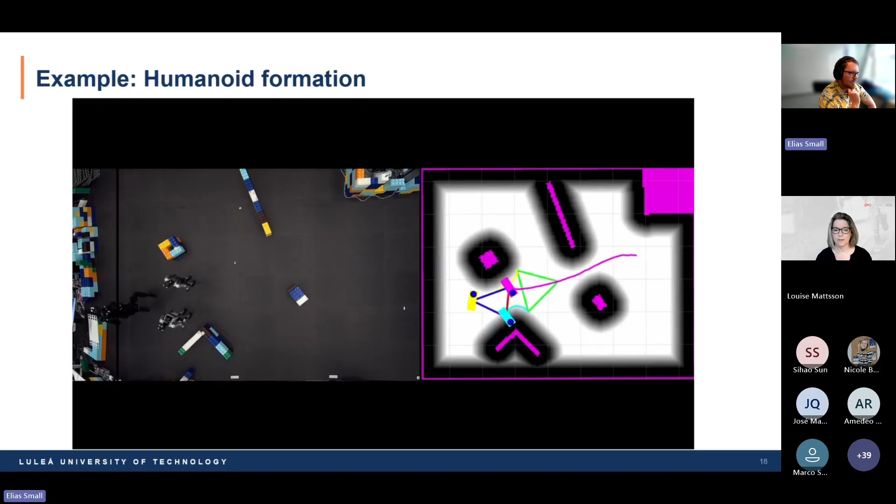These are also marked with Vicon markers, so the information being shared is this global map we see to the right, where the pink are the objects that are completely untraversable, and the blackened areas are more dangerous or areas that should be avoided. And they're also aware of each other's presence, so they're trying to remain in this triangular formation, but at the same time being adaptive to what's going on.

In this case, we've even done the experiment with a person holding one of them back, and the rest wait for that bot, and then once they have a sort of triangle, they keep moving, doing their mission.

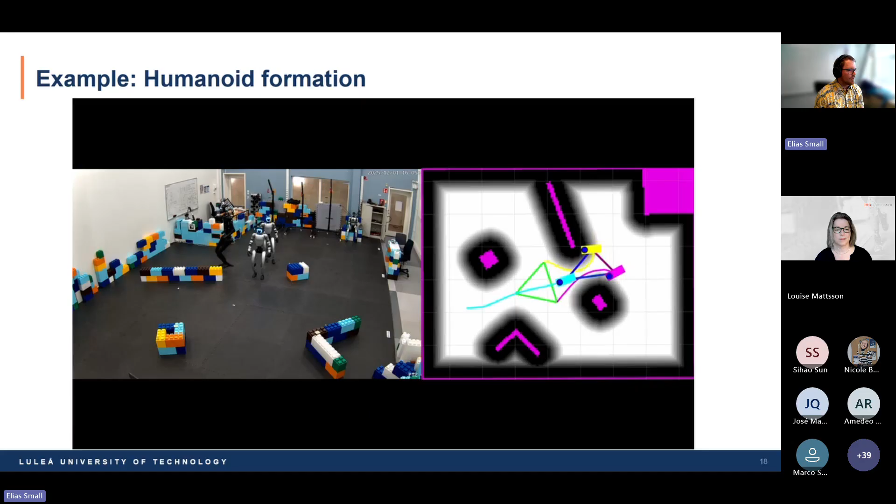And finally, yes. Yes, are you getting towards the end? This is the final slide.

One of our future plans is to get a bodysuit with the Vicon markers, so we can actually train more realistic and more complex movements. But at the moment, we have these that we attach and refer to each of its joints as a separate object. Yeah, so that was the final slide.